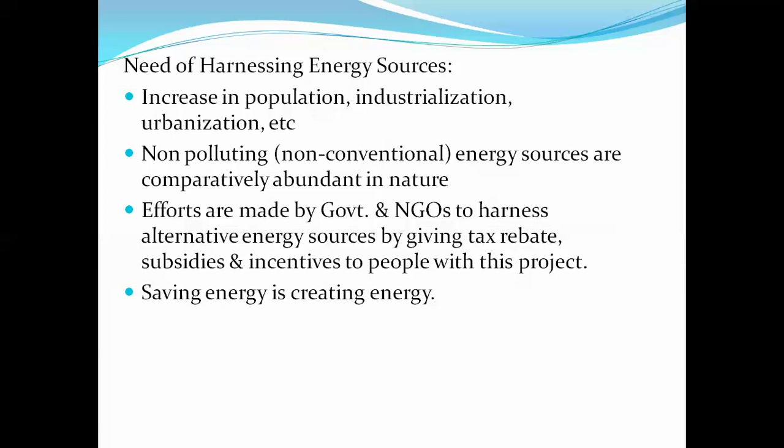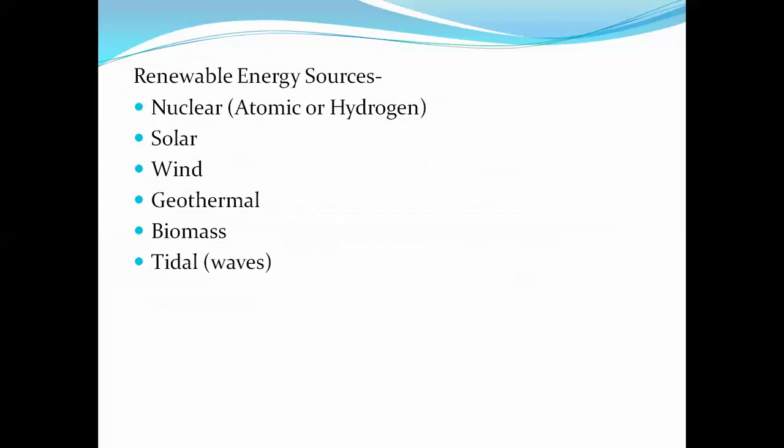The renewable energy sources are nuclear, atomic or hydrogen energy source, solar energy, wind energy, geothermal energy, biomass, and tidal waves energy. These are also called non-conventional energy sources. It is the need of the 21st century to harness them, since conventional energy sources are depleting day by day, making it necessary to create alternative sources of energy. These alternative sources are abundantly available in nature and do not produce pollution on a large scale.

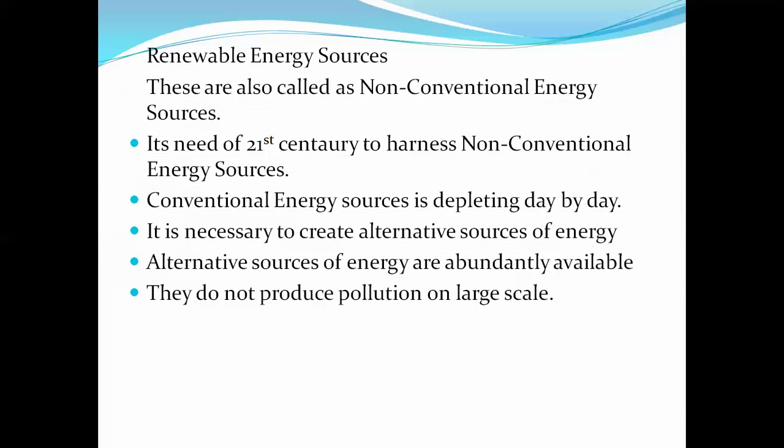Let's start with the renewable energy sources. First is nuclear power. It is obtained by fusion reaction of heavier unstable atoms, where nuclear fusion is done for the heavier nuclear atoms.

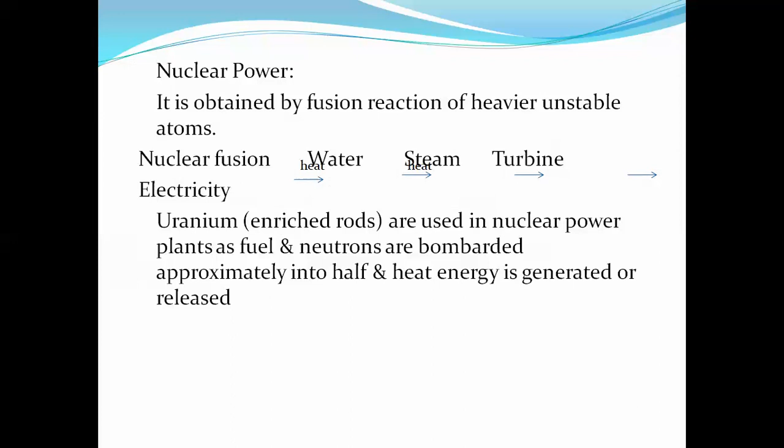Hence heat is generated, due to which water is heated and steam is produced, which rotates the blades of the turbine. The shaft of the turbine is further connected to generators producing electricity. Uranium-enriched rods are used as fuel in nuclear power plants, and neutrons are bombarded, splitting atoms approximately into half, releasing heat energy.

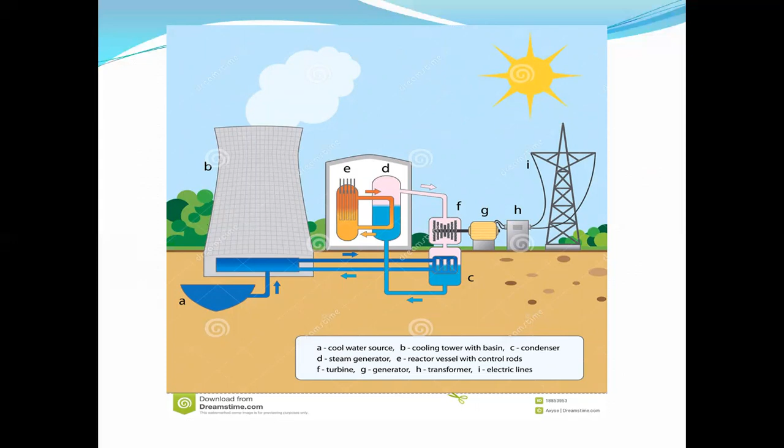This is the pictorial view of the nuclear power plant. The advantages of this power plant are: a huge amount of energy is generated from very little fuel, production of waste is small, and if properly controlled, no pollution is created, and it is not very expensive.

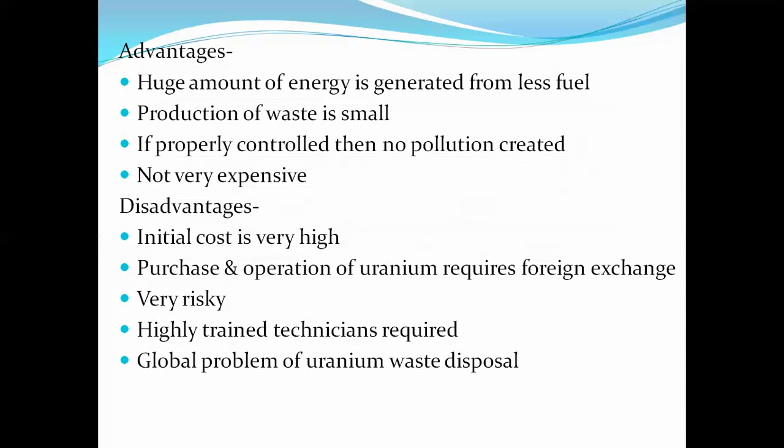But there are a few limitations as well. Initial cost is very high. Purchase and operation of uranium requires foreign exchange. It is very risky and needs highly trained technicians for handling. There is also a global issue of uranium waste disposal.

Solar energy: solar radiations arriving at Earth's surface, called insolation, are in the form of electromagnetic waves. These solar radiations are intercepted by a suitable collector system, and the heat energy available can be used for heating air, water, or liquid as required.

Uses of solar energy include solar pumps, desalination and distillation of water, electricity generation through photovoltaic cells, solar drying for food, solar cookers, lamps, chargers, etc., and solar vehicles.

As there are advantages, there are a few disadvantages of solar energy as well. The production of power is not huge, and it requires high erection cost. The generation of power also depends upon the weather conditions.

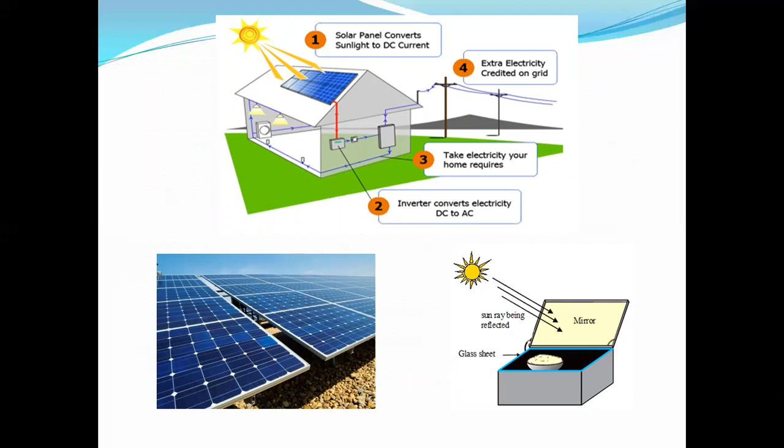This is the pictorial view of solar power generation. Solar panels can be seen in the picture, as well as the solar cooker, which can be used for domestic purposes such as cooking rice, etc.

Let's go ahead with the next renewable energy source, wind energy. Kinetic energy possessed by wind due to its velocity is the wind energy available. Wind is allowed to flow past the blades of a windmill; the blades rotate, and the shaft on which they are mounted also rotates, thus changing the form of energy.

The advantages of wind energy are that it is non-polluting and can be installed in remote areas where electricity is not supplied. Disadvantages are high initial cost and no guarantee of required power generation; power generation also depends on the location of the windmill, which should not have any obstruction nearby.

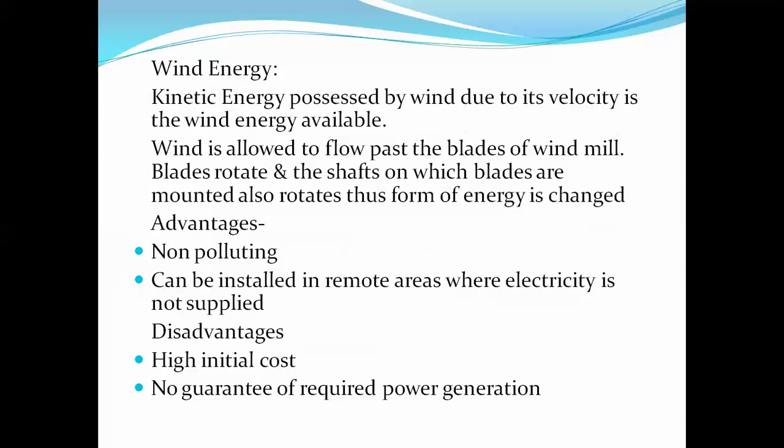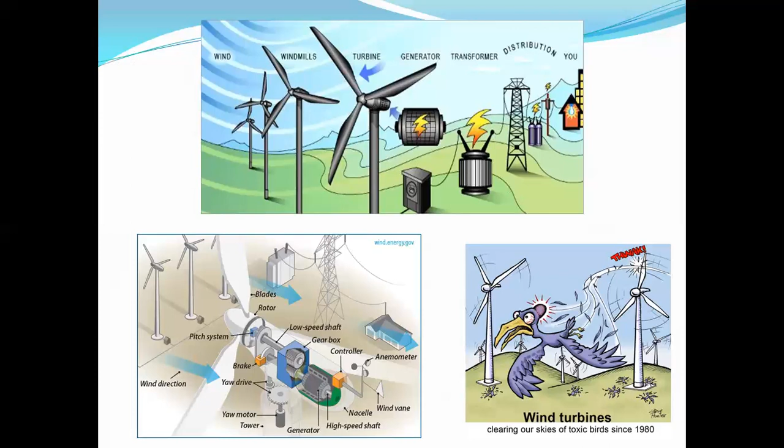Here you can see the pictorial representation of the windmill, power generated through windmill. The turbine is rotated with the help of the gusty effect of the wind, and from the shaft the power is generated with the help of generators, and through transformers the electricity is distributed to the consumers. You can also see the cross section of the windmill. One disadvantage of the windmill is that the aerial ecosystem is also affected by it.

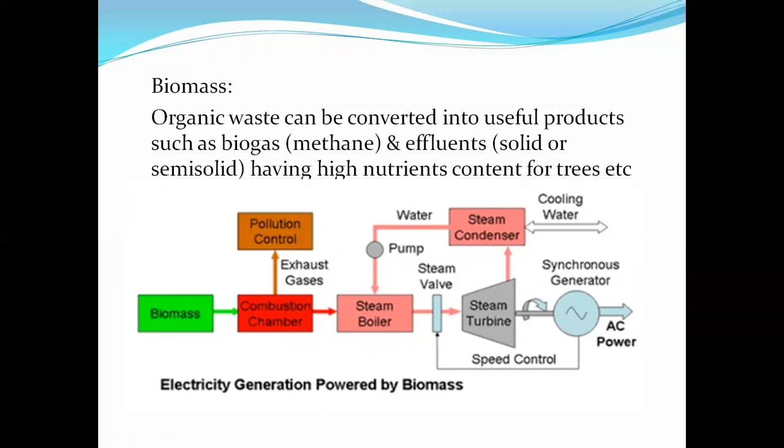Biomass: organic waste can be converted into useful products such as biogas, methane, and effluents, solid or semi-solid, having high nutrient content for trees, etc. Here you can see a flow diagram where biomass is combusted into chambers, due to which steam is generated, and the steam helps rotate the turbine, which is further synced with the generator that generates power, and further the steam is passed through the condensers.

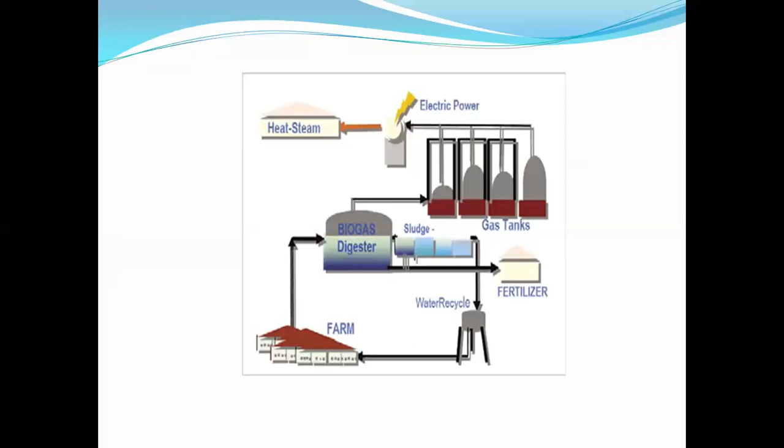The heavier particles settle down, and the lighter particles are drawn as sludge, which can be purified and led back into the natural streams. The heavier particles can be used as fertilizer, which helps as nutrients to the plants.